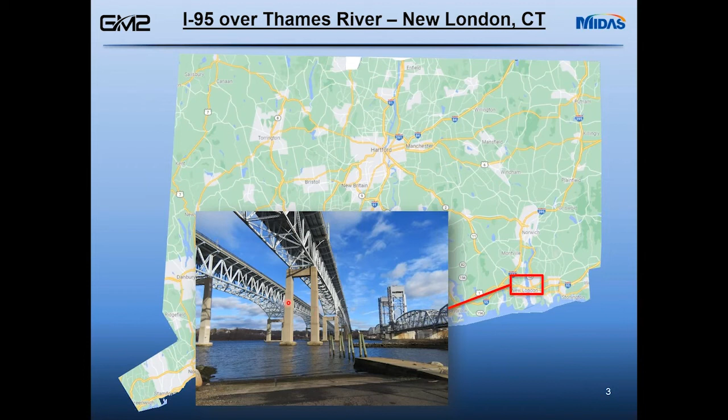This is a map of the state of Connecticut. For those of you that are not familiar with the area, this here is New London on the southeast corner of the state, and this that you see here is the Thames River. So that I-95 going over the Thames River is where the Gold Star Bridge is located. The bridge carries I-95 both northbound and southbound traffic. We did the load rating for the southbound bridge, which is this one, and that's the one that I'll be presenting today.

Here's another look at the bridge. Again, this is your northbound bridge, and that'll be your southbound bridge. The bridge is comprised of 30 spans with 3 different types of superstructure, which I'll speak to in a minute. It's just over a mile long, and combined with the northbound bridge, they have a deck area of about 1 million square feet, making it the largest bridge in the state. The bridge is really critical to the state of Connecticut, not only because of the extent of the structure, but also because it carries a good amount of traffic. So it's really critical for the traveling public in the state of Connecticut.

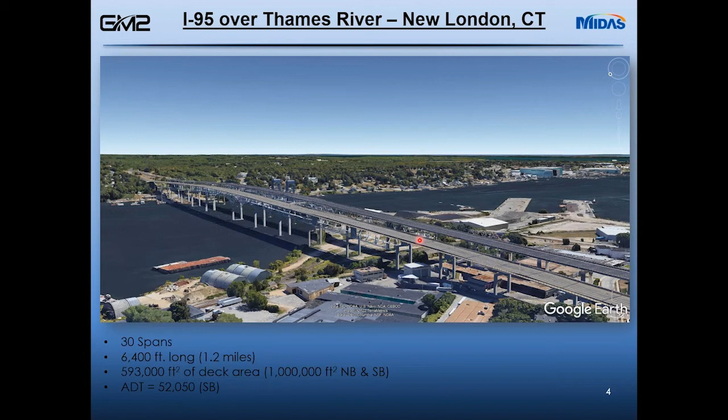Going a little bit more into the different superstructure configurations of the bridge, we have some multi-girder, kind of your typical plate girder bridge on the approach. Then you have some GFS superstructures. And then the main span, which is the one that spans over the river, is a deck truss comprised of 11 spans.

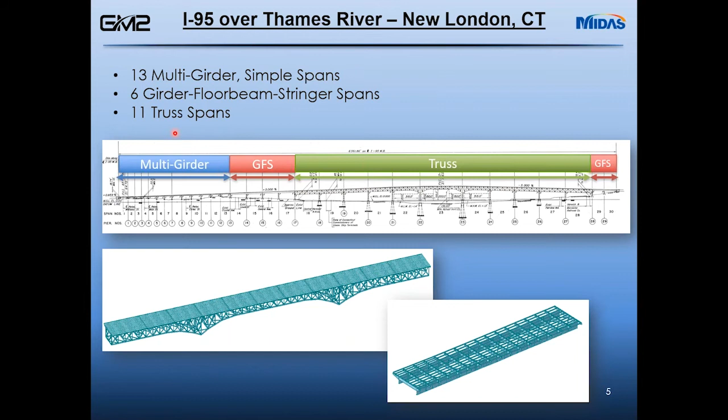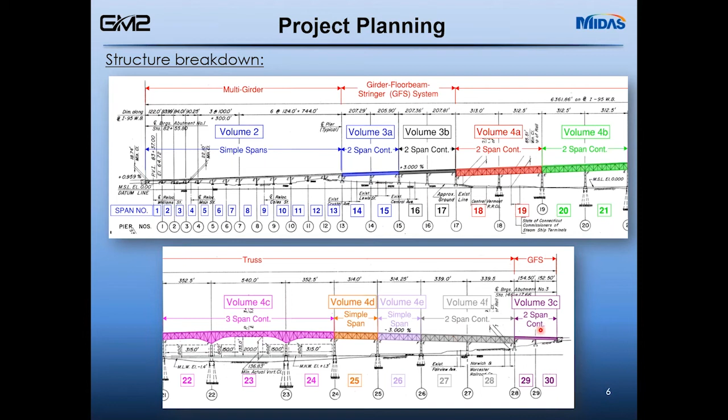A little bit more detail into the structure breakdown. The first 13 spans are the simple span composite steel plate girder bridge. Then from 14 to 17, you have the girder floorbeam stringers, or GFS systems. You have a two span continuous superstructure there, followed by two span continuous trusses. The main span, which is a 3-span continuous truss, then a couple of simple span trusses, followed by a 2-span continuous truss, and finally ending with a 2-span continuous GFS.

The reason for the project is we were updating the load rating to LRFR. We had a timeline of 3 months, which, as you can probably tell, is a very tall order, a very aggressive schedule. I think that's really one of the things that drove us to really focus on the planning ahead of time.

So overall, we had 22 superstructure units. That is 22 different models that we built. Just looking at the magnitude of the number of members that need to be load rated gives you an idea of the aggressive schedule that we had.

We had to rate the truss members, the floor beam connections, gusset plates, stringers, floor beams, and the girders.

So early on, even before we received the notice to proceed, we began a very extensive planning phase, just to make sure that by the time we received the NTP, we were already set to hit the ground running.

The first thing we did was establish the resources. What are the resource needs for the project? We figured we would need about 12 people full time for the duration of the project. That's a good amount of people, so we needed to plan ahead of time and time it properly to make sure that by the time we hit NTP, we had those 12 people available to work on the project.

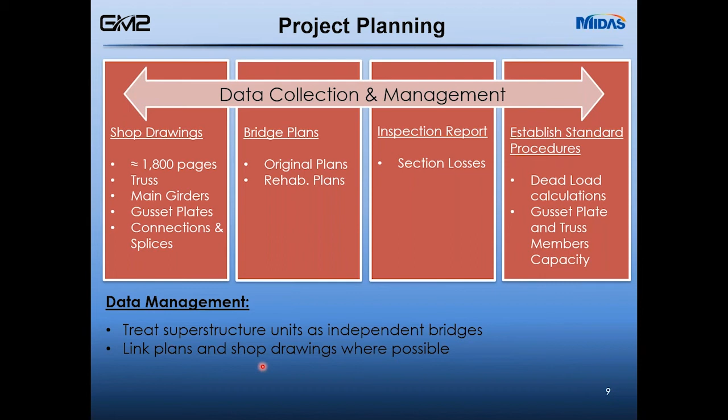We also linked the plans and the shop drawings where possible. An example of that is the gusset plates. The plans will show you just some general details of the gusset plates, but the actual details you needed to calculate the capacity or the dead load of these gusset plates would need to be found in the shop drawings.

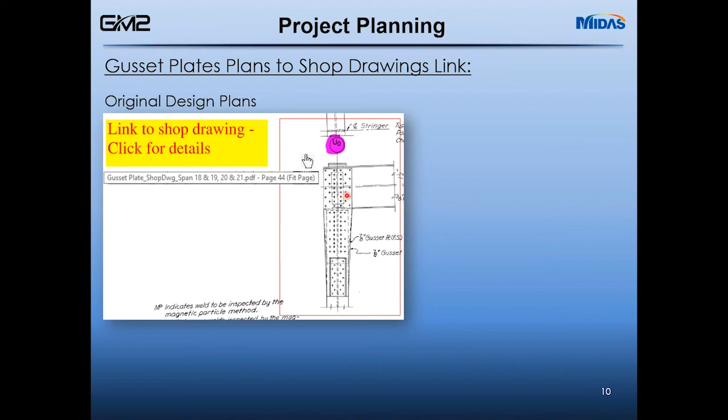So after we brought the shop drawings and the plans into the different superstructure units, we added hyperlinks to the plans. A person would go to the plans, look at for example panel point U0, click on that, and it would automatically open the file of the shop drawings with the corresponding gusset plate or panel point detail.

This was really important for a couple of reasons. First, we didn't want somebody to inadvertently use the wrong panel point or the wrong gusset plate just because of having to flip through the shop drawings. Second, we had multiple people who needed to access these details, right? Whoever was dealing with the dead loads needed to access this.

If a different person was dealing with the capacity of the gusset plate, or whoever was checking those things, they needed to access this as well. Given the time constraint we had, we didn't have time for every person who needed access to familiarize themselves with the shop drawings and where the different things were. So whoever needed access would just go to the plans, click on this, and have direct access to the correct panel point. This hyperlinking and split of the shop drawings was done in the early stages and was QC'd before we started using it.

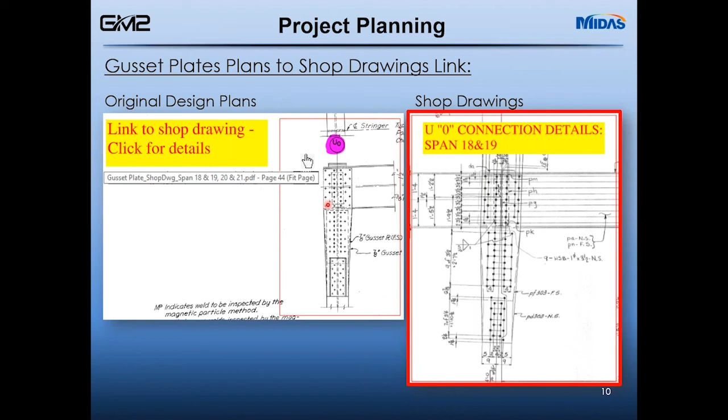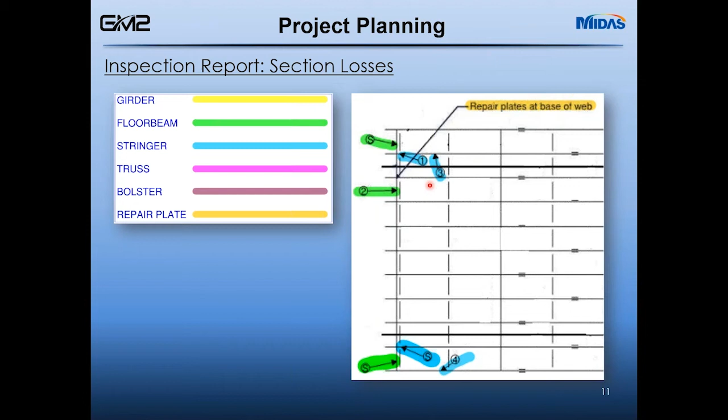Regarding the standardized dead load calculations I mentioned earlier, they were done to maintain consistency throughout the project, but also helped quite a bit with expediting the QC process.

For example, for the dead load calculation of the gusset plates and miscellaneous plates at a panel point, our engineer would highlight the plates considered in the dead load calculations, using the same color to highlight the information in the bill of materials. Then in the Excel used to calculate the dead load, instead of just plate number 1 through 7, we'd actually use the plate ID as shown in the bill of materials. So for someone to QC this, they'd go to the plans, use the hyperlink to get to the shop drawings, see everything color coded, and the input in the Excel looked exactly as it did in the bill of materials — they just had to make sure it matched.

This really helped us make sure, first, that we did things correctly, and second, that we had an effective QC process.

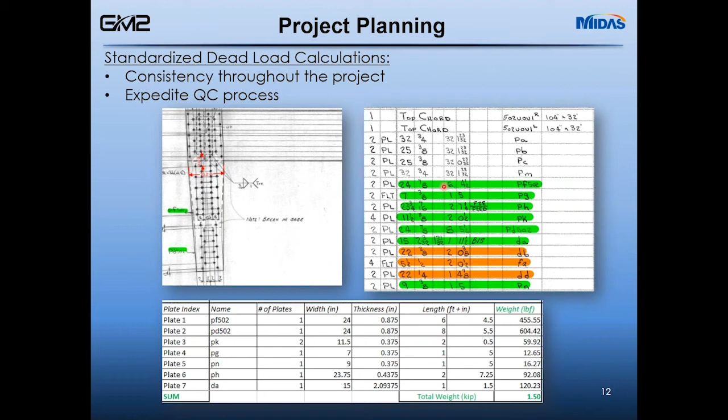Something else we did early on, when planning this, was establishing an element numbering convention for all the models throughout the bridge. This was important because we wanted our engineers working on the post-processing part of the project to be able to identify where on the bridge they were just by looking at the element number, avoiding multiple people having to go into the MIDAS models just to figure out what element or member they were looking at.

For example, a number like this would imply it was a truss element — one for the north truss, two for the south truss. The third digit was for the member type: upper chord, lower chord, diagonal, or vertical. The last two digits were the panel point. So looking at a number like this, you'd immediately know it was a truss element on the north truss, the diagonal member at panel point number 2.

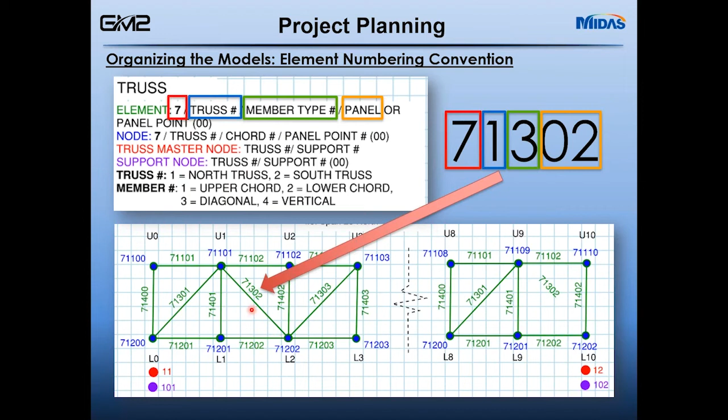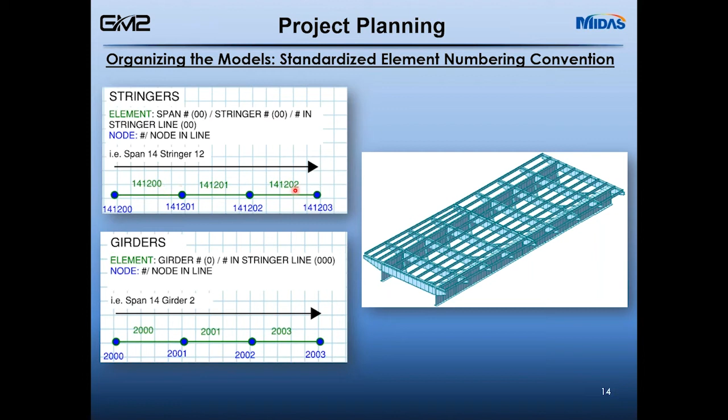We did something similar with the stringers and girders throughout the project, with slight differences. For the stringers, we embedded the span number in the element number, so this would mean span 14, stringer 12, element 00 — the first element — and it would sequentially increase after that. The same applied for the girders.

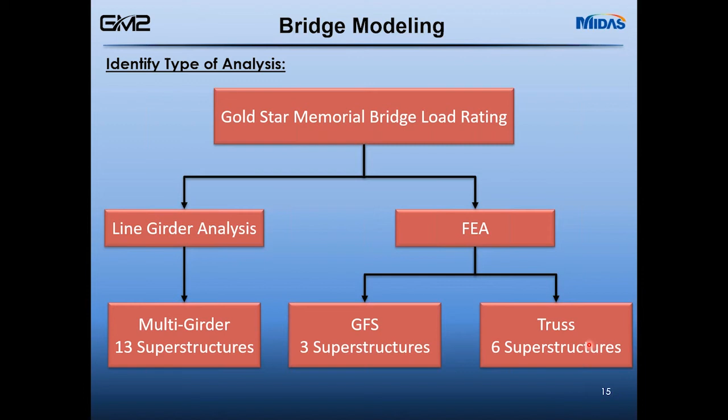Once we had a baseline of what we wanted to do and a framework to start modeling, we had to decide what type of analysis we'd need for each superstructure. The first 13 spans were the more typical composite steel plate girder bridge simple spans, so we did a line girder analysis for those. The GFS and the truss were more complex structures and really warranted an FEA analysis, so for those we did an FEA using MIDAS Civil.

When it came to the modeling, it was really important for us to make sure that we did everything as efficiently as possible. So while we had the data collection and the calculations going on, we were simultaneously working on developing the CADs and the model templates.

The CADs were being developed to eventually import the geometry into MIDAS Civil. We used different levels or layers for the different members, so that way it was a lot easier to assign

the structure groups in MIDAS once you import that CAD into MIDAS. Something that I think really helped us a lot to fast track the modeling was the model templates. So what we did is we created one model template for the GFS spans and one for the truss spans, and these were essentially blank models, right? There were no nodes or no elements. On these models, what they had was the materials and the sections already defined, and you had all the structural boundary and load groups that you needed, and also the construction stages were already set.

So once we had those templates, we copied that 3 times for the GFS and 6 times for the trusses, and that allowed us to have somebody put the actual section properties into each of these models while the CAD and the calculations were going on. So by the time you had the calculations, the CAD and the model templates together, it was just a matter of importing the CAD, adding the dead load calculations, assigning the materials and sections to the different elements as needed, and you pretty much had a model.

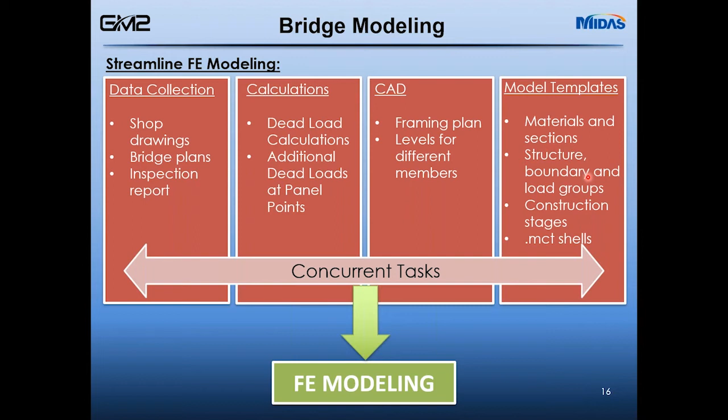We also use the MCT shells. For those of you that are not familiar with MCT shells, it's a very good feature that MIDAS has, where it basically allows you to export any model as a text file. So you can take different chunks of that model and actually create a template, if you will.

So we use that for the vehicle libraries and for the moving load cases, where we created the vehicle library and moving load cases using the user interface for one of the models, and then we exported that to the other models.

So the good thing about that, again looking in terms of fast tracking the production in the modeling and the QC, is once you create that template and you QC it, there's no real need to QC that on every single model. The only thing you have to make sure is that they were imported correctly. So the engineers didn't have to define every single vehicle on every single model, and at the same time, the checker didn't have to check every single vehicle on every single model.

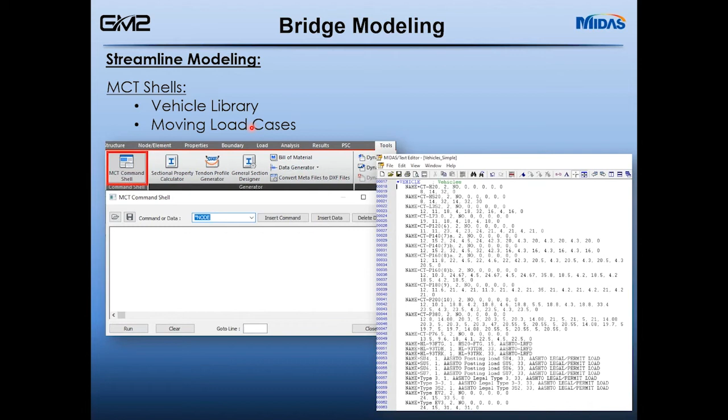When it came to modeling, we really had two main challenges. The first one is consistency in the modeling, given the fact that we had a lot of people working on different models. Those we addressed by the pre-planning and establishing the workflows that I just mentioned.

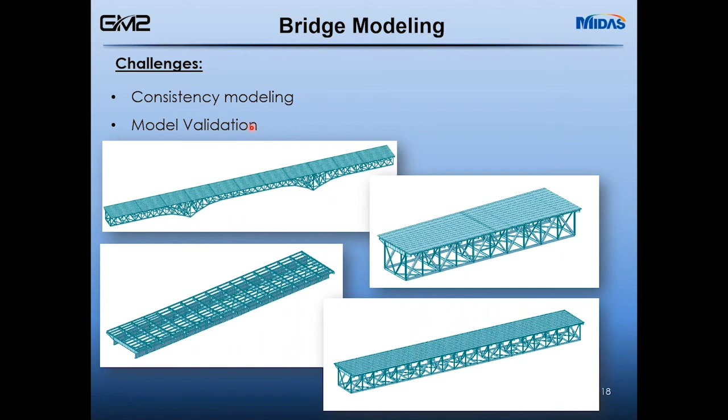The second main challenge was really the model validation. It doesn't matter how experienced of an engineer you are or how many models you have created. In my view, validation is really part of the QC process, and every single model needs to be validated, because subtle differences between superstructures, geometry, and links could really make a model behave differently from another model. So we did a validation of these models.

I just want to bring a few of the issues that we noticed and corrected during our validation process. The first one: we looked at the bending moments on the stringers, and we noticed that it didn't look quite right. You have a sudden jump from positive moment to negative moment, so it was clear something was going on. Also, the magnitude of the moments were really high.

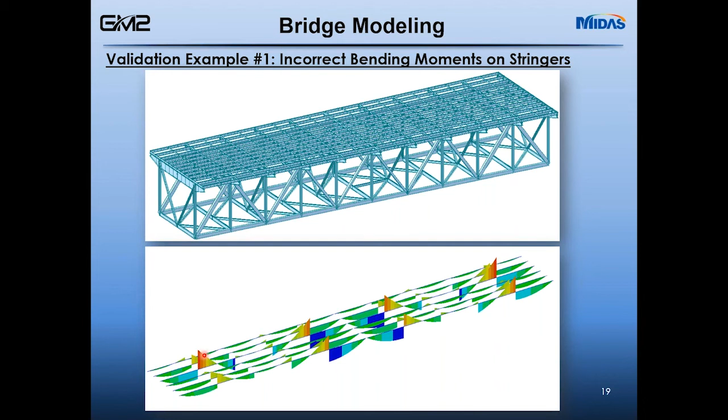So we took a closer look to see what might be the cause, and we figured there were two factors really affecting that. The first one was the rigid links that we had from the stringers to the floor beam. We had all the degrees of freedom constrained, and that combined with the deflection of the truss was basically inducing unintended additional bending moments to the stringers, hence the jumps we were seeing in the bending moments.

So the immediate first solution that we thought of is, if that's the issue, then we can just release the rotation degree of freedom on the rigid link.

However, our structure in the model was not aligned with the global axis, so we couldn't really do that. The reason for that is we developed our CAD exactly as the bridge was shown on the plans, with the working points and everything, because that was really the most effective way to make sure we got it right the first time around, and it also helped expediting the QC process.

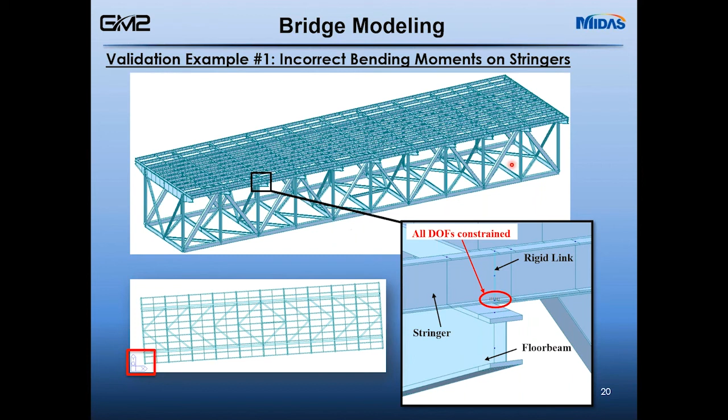So we actually decided to remove the truss from the model, and just for the analysis and load rating of the stringers, we had the models without the truss, and we added supports to the floor beams at the locations where you would have the truss. After we did that, we essentially corrected the bending moments on those stringers.

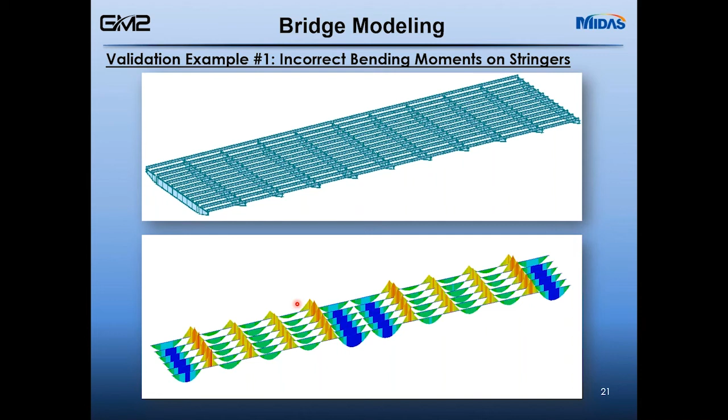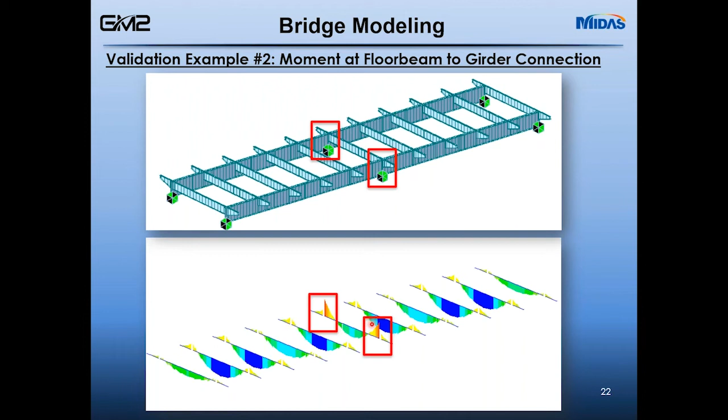The second issue we corrected was we noticed that in one of the GFS spans, one of the floor beams was picking up a large negative moment at the connection with the main girders. Most of the floor beams have about the same magnitude of negative moment at that connection, but this one was really high. So we took a closer look at what may be causing that, or how could we correct that.

This is what the connection looks like, or what the typical section looks like at that span. Looking at it, we have the knee brace here, which we did not include in our initial model, again just to simplify the modeling.

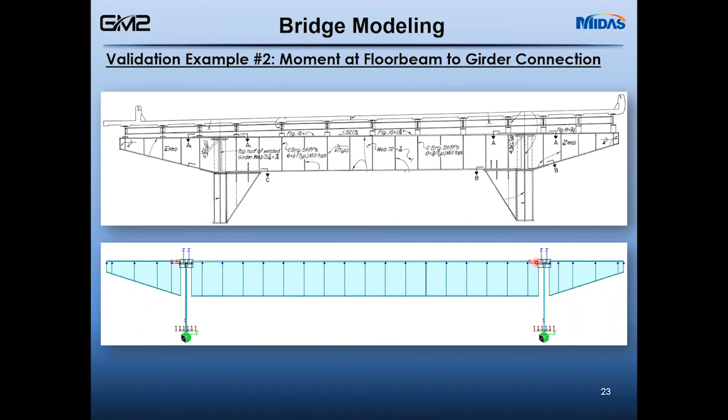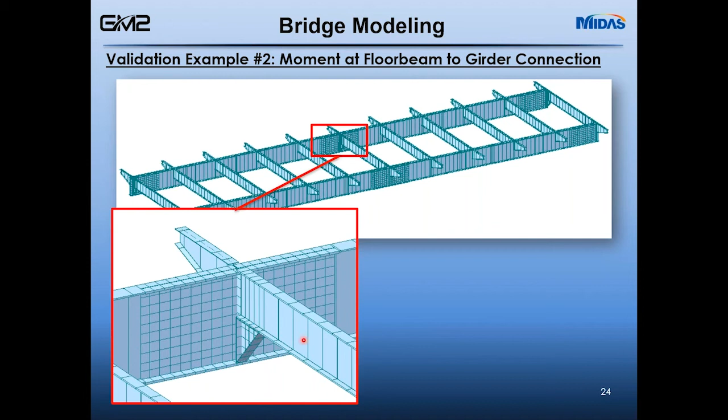So we decided to do a more refined model to see what is the actual behavior of this connection. We created a localized refined model where we used plate elements for the webs, and we also included the knee brace into the model. So once we had that refined model, that's the typical section of the bridge, and this is what the refined model looked like.

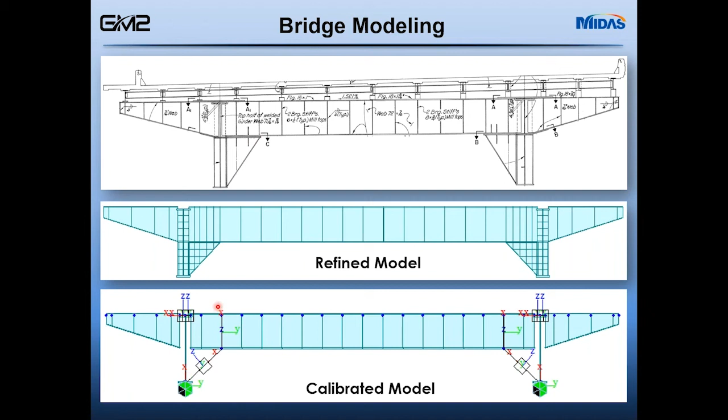Once we had that refined model, we went back to our initial model and added a series of links to simulate that knee brace. And we calibrated the stiffness of these links to match the results from the refined model.

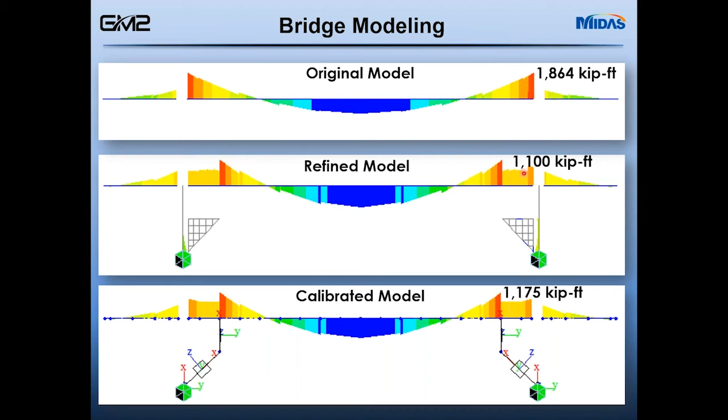This is what it ended up looking like for one of the load cases. The original model had a negative moment of about 1,800 kip-feet. The refined model reduced that to about 1,100, and then the calibrated model with the links, we modified it to match as closely as possible the 1,100 kip-feet of the refined model.

The last validation example I wanted to bring is the bottom chord of one of the trusses. This is what I mean by where I see the importance of validation. We had 6 different truss models. Out of the 6 models, we only saw this issue on this one model.

We noticed that the moments in the bottom chord were not, both from a qualitative standpoint as well as the magnitude, what we were either expecting or seeing on the other spans. So we actually spent a good amount of time trying to figure out this one. Luckily, it was a simple fix.

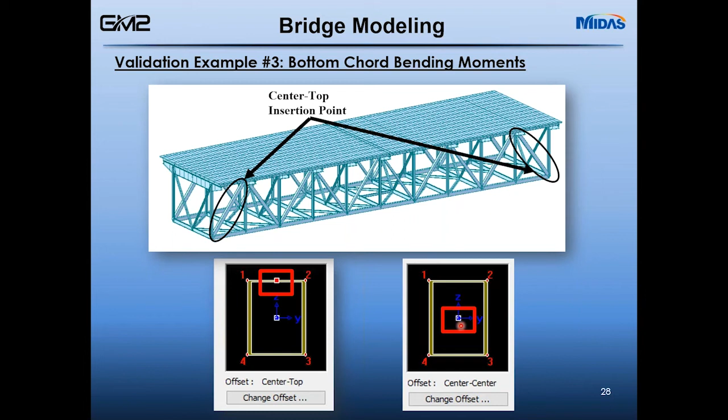What happened was that out of all the truss members, these diagonals here were inadvertently modeled with the insertion point off-center instead of centered. That eccentricity of the insertion point was causing the irregularities in the model. Once we fixed that, we changed that member to have a centered insertion point, and we went back to the expected bending moments and much more realistic magnitudes, similar to what we were getting on the other spans.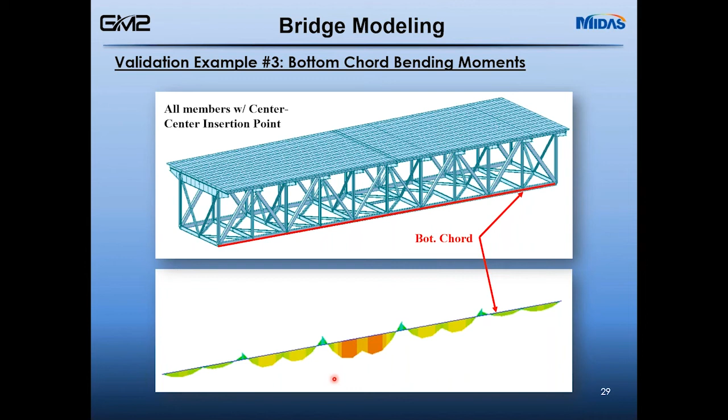So my hope with this is that you see the importance of validation. A lot of these issues were really picked up because of our detailed validation process. So again, I can't stress enough that validation is really part of any QC process.

Moving on to the analysis of the gusset plates. This was perhaps the most challenging part of the load rating, because we had a very large number of gusset plates. We wanted to make sure that we were doing this in the most efficient way possible. We looked at 11 failure mechanisms, basically the applicable mechanisms from the MBE.

So when we started this, we were thinking, is there any way that we could set this up such that we don't have to look at 220 capacity worksheets line by line to make sure that everything was input correctly? So we ended up coming up with the approach of having one Excel file for each superstructure unit, and that Excel file will have all the inputs needed to calculate the capacity of the gusset plates.

We created one capacity calculation worksheet, and that was done early on in the project, and it got QC'd. Once we were sure that it was entirely correct, we proceeded to copy that 220 times. The good thing about this is that we didn't have to check the inputs in all of these 220s because we already had that Excel.

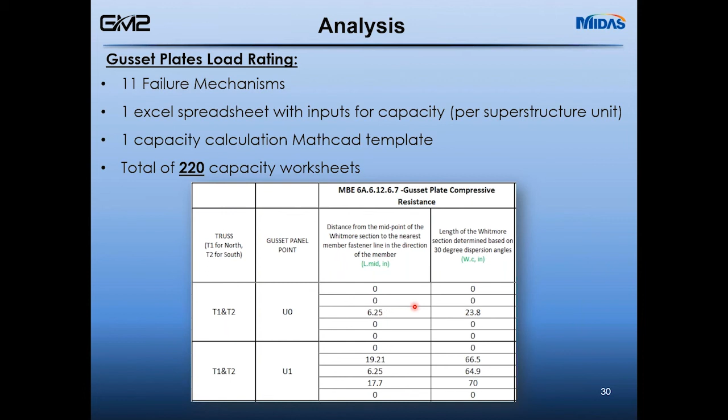It will also allow you to create what we call an equivalent static load case. So this load configuration can be converted into a static load case, and then you rerun your model for that static load case, and that will give you the member forces on all the other members for the load case that maximizes the load on that member.

The challenge, again, given the large size of the bridge, was that we had to create over 80,000 static load cases to load rate these gusset plates.

Luckily, MIDAS has a feature called batch conversions that lets you tell MIDAS, I want to generate the static load cases or the equivalent static load cases for all of these members, and it would pretty much automatically do it.

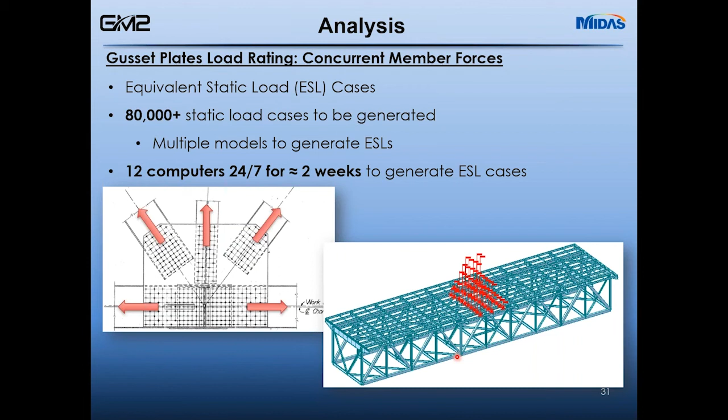For the truss ratings, we did something very similar to the gussets, in the sense that we had an Excel with all the inputs needed for the capacity calculations. We had one capacity template, and that ended up being copied over 300 times.

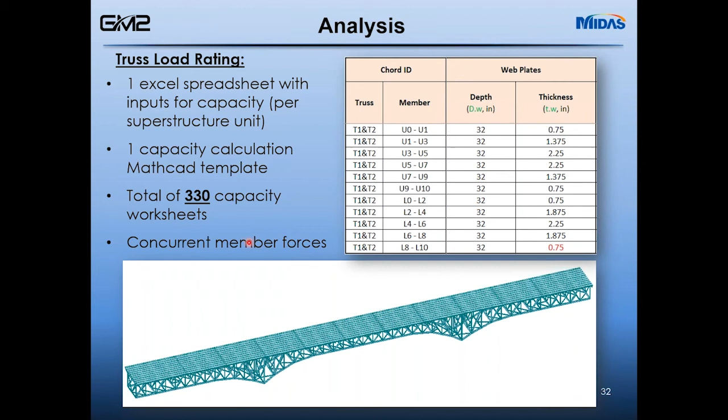We also used concurrent member forces to load rate the truss members. Luckily, the same equivalent static load cases that we used for the gussets worked for the truss, so we only had to do that once.

Overall, the project was a success. The key factors that contributed to the success of the project: extensive project planning, trying to foresee what were the different issues we were likely to encounter. The validation process, again, can't stress this enough, really, really key in any project.

Establishing workflows was really important to make sure everything was done consistently by the different people working on the project. Execution, it really takes everybody working at their best to get this done. You can plan as much as you want, but it really takes a good team effort to execute properly and get you to the finish line.

And last but not least, having a very good QC process and model, and establishing workflows with QA and QC in mind.

I think it's probably in line with what I mentioned. Can you show the question? Yep, give me a second, I just need to edit the PowerPoint. Can you see the question right now? Yes.

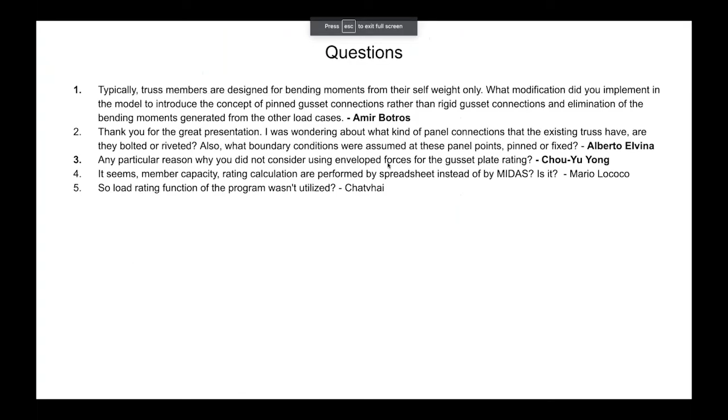What kind of panel point connection does the existing truss have? So these are bolted, well, a combination of bolted and riveted gusset plates, and the top and bottom chords were continuous. The diagonals were assumed to be pinned at the ends. So we had a combination depending on the detail of the member, either fixed or continuous through the panel point, or pinned at the panel points. Generally, top and bottom chords were fixed or continuous through the panel point, and vertical and diagonal members were just pinned.

Okay, thank you so much. Next question from Chou-Yu Yong: any particular reason why you did not consider using envelope forces for the gusset plate rating?

Yes. So basically, depending on the failure mechanism you're looking at, you're looking to load rate your gusset plate. Having envelope forces may not necessarily always be conservative. If you're looking at the left side of the gusset plate, where you have your bottom chord and your diagonal coming in, there is a potential for the load on that diagonal to act opposite to the one on the bottom chord when you're looking at the maximum force on the bottom chord. So for gusset plate analysis, you really want to base it off of concurrent forces, to make sure you're looking at the actual loading condition and not underestimating or overestimating the capacity of the gusset plate, or underestimating your loads.

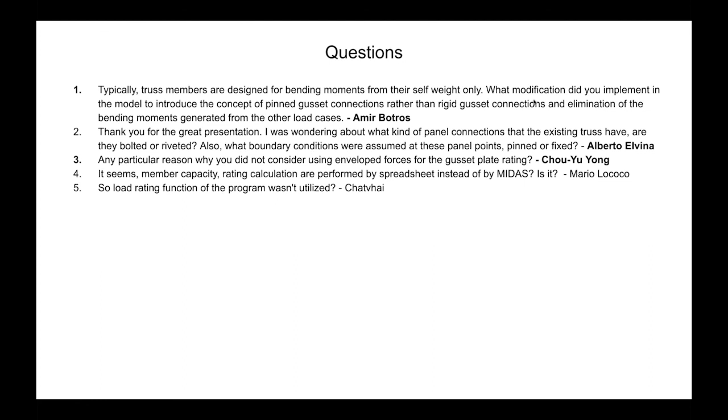Luis, the next question is from Opio Hunter: how long did the modeling and load rating portions of the project take? I don't know, the overall project took about 3 months.

I would say for the first few weeks, the first month, we were just setting up or organizing the data, and basically breaking the bridge down into smaller pieces. The whole modeling just kind of blended in, we had a lot of overlapping tasks, but if I had to say something, I would say about a month and a half. But again, before we were done with the modeling of the full bridge, we were already starting the post-processing of the spans we had modeled. So it's kind of hard to give a definite answer on that.

I see, totally understandable. Next question is a follow-up from our expert engineer, Amir Botros: experience has indicated that releasing the moments at the ends of truss members usually results in instability problems. Any recommendation for that? Yes, that's a very good point.

Okay, next question from Chou-Yu Yong: Was construction staging being considered?

Yes, all of our models had construction stage considered.

Next question from Stephen Smith: Was the load rating analysis performed using MIDAS Civil's built-in load rating functions? I think this is the same as the previous question, so we can skip it.

Was an influence diagram or surface considered for the live load analysis, from Jared Thoele? Yes, the moving load analysis that MIDAS does is based on generating influence lines for essentially all the elements included in the analysis. Next question from Yiming Lan.

How are the critical load ratings summarized and members located, and were the deteriorations accounted for? I'm not sure I understand the first part of the question, and I think there are some words missing. For the second part, yes, the deteriorations were accounted for. Early on we marked up all the section losses in the inspection reports, and once we had the models, we included those deteriorations in the post-processing stage.

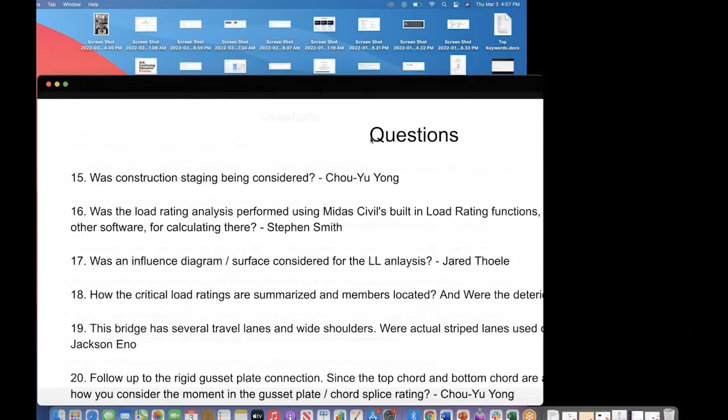Sorry guys, are you muted? Again? My bad, next question.

Follow up on the rigid gusset plate connections. Since the top chord and bottom chord are assumed to be continuous, can you clarify how you consider the moment in the gusset plate or chord splice rating, from Chou-Yu Yong? The MBE has some provisions for that, but basically you have the moments or member forces coming from MIDAS, so you'll have all that information. Then all the plates crossing the splice plane, including the gusset plate, get accounted into the stiffness and the capacity of that chord splice rating.

Thank you, Luis. Next question from Srikota, our loyal user: Can you speak to the results? Were any members or gusset plates found to be critical that need rehab? I appreciate the question, but right now, off the top of my head, I really don't recall the ratings or results, so I can't speak to that. We're also still making some refinements, so at this point none of the ratings are finalized.